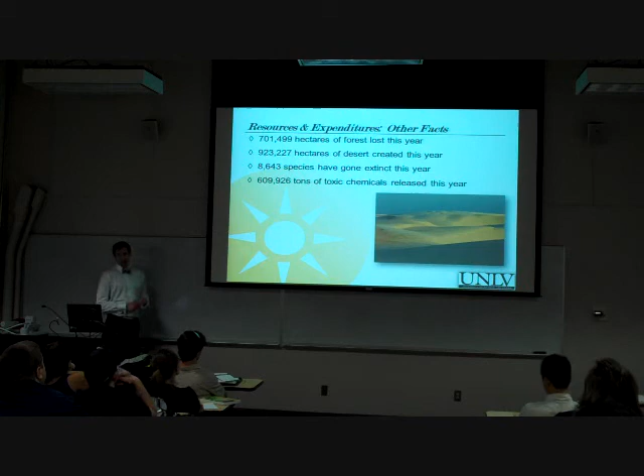701,499 hectares of forest have been lost this year. Hectares are a little bit bigger than a football field. Nearly 1 million hectares of desert were created this year. 8,643 species have gone extinct, and 609,000 tons of toxic chemicals have been released in some capacity this year alone.

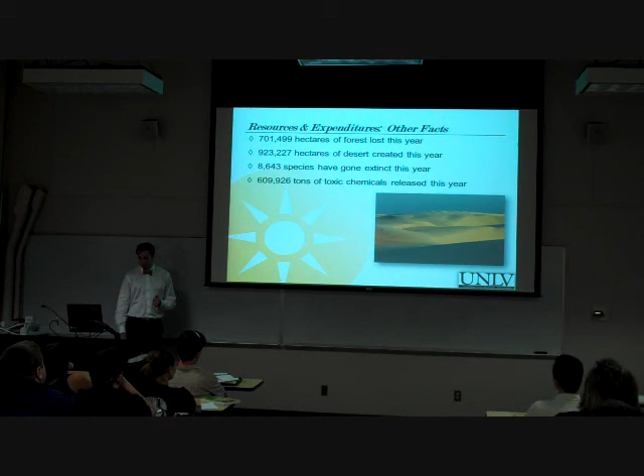So there's hope. Starts with this class, right?

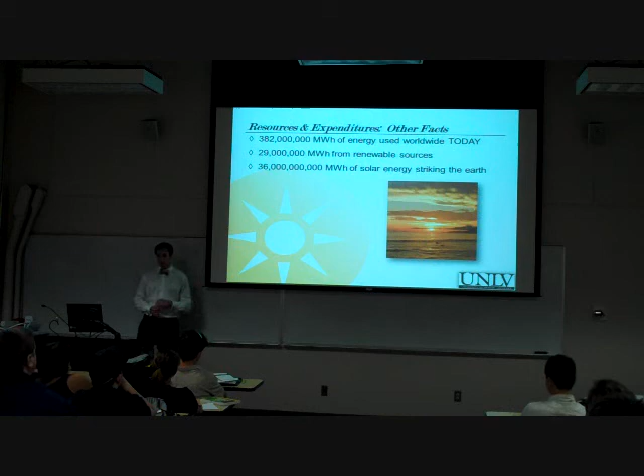To some small degree, 382 million megawatt hours of energy are used worldwide today. Only 29 million of that is from renewable sources, which is less than 10%, I will say it's around 7%. But at any given time, 36 billion megawatts of energy from the sun are striking the earth at the same time. So trying to harness that number is really one of the big keys to a more sustainable, lower emissions future.

So there is a movement, we'll talk about it, moving to distributed energy. Who knows what distributed energy generation is?

What if you had a solar panel on every roof that's already in a disturbed area? That's kind of what we've been talking about, sustainable land use, not disturbing parts of the Mojave National Preserve or really windy parts of Oregon that might just be virgin greenland right now. But actually distributing that energy to places that already are disturbed, over parking lots and parking garages and on rooftops. So that's one of the debates we'll talk about a little bit.

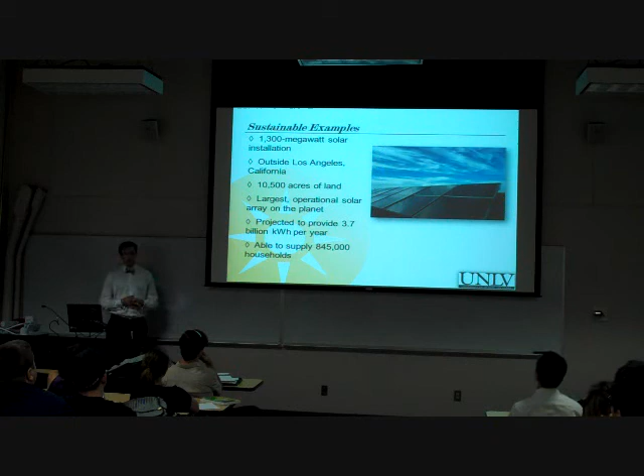Distributed energy might be a better solution. A 1,300 megawatt solar installation outside of LA, 10,500 acres of land, the largest operational solar array on the planet, is projected to provide 3.7 billion kilowatt hours per year, able to supply 845,000 households.

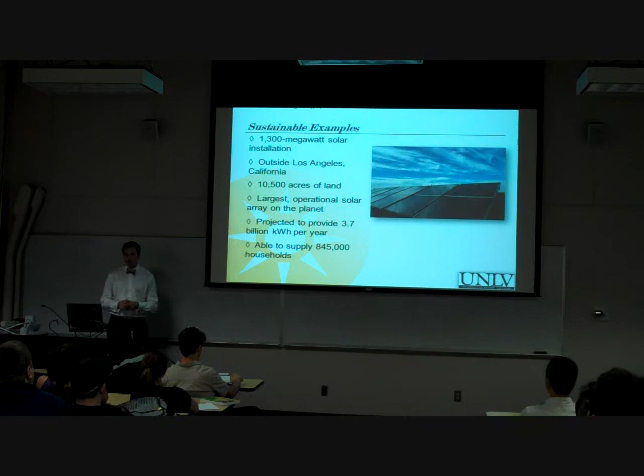So you have to temper all these things we're going to be talking about as a trade-off. If you have low flow fixtures, that might be a trade-off in terms of occupant comfort. You have light sensors that go up and down hallways, so you won't have the lights on all the time, and people might think they're closed or something like that. So there's always a customer trade-off, a social trade-off, or an environmental trade-off. In this case, you might get solar renewable energy that's not polluting the environment directly, but you're taking up 10,500 acres of land.

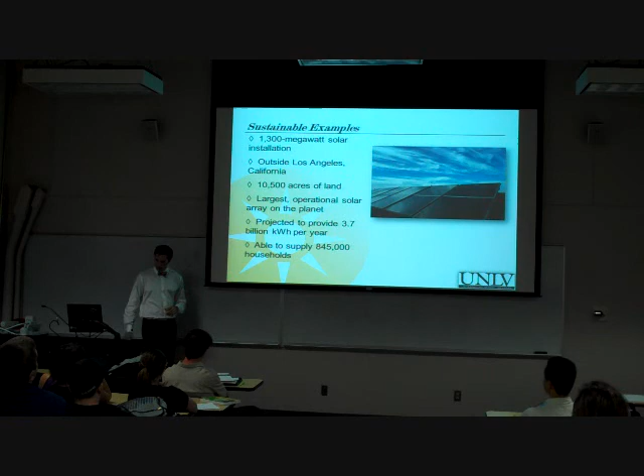If you ever notice walking around campus, it's much cooler within that quad area than it is when you're walking from the parking lot or walking off of Maryland into that area. So just think about those little microclimates. If you ever go to the Springs Preserve, that's a really good example of a microclimate. They have a lot of desert adaptive plants that retain moisture, provide shade, and keep the temperatures down overall. So exploitation of microclimates is a good example used here.

If you just have one window, you're not going to have much of an effect. If you ever just open one window in your car, you usually want to do the opposite one, diagonal across from you, right? Same idea in a house, an apartment, or a commercial building like this. Also recognizing the fact that heat rises, trying to provide ventilation out the top of your building, creating an actual swoop: cool air coming in, and hot air going out the top. Proper orientation—what do I mean by proper orientation?

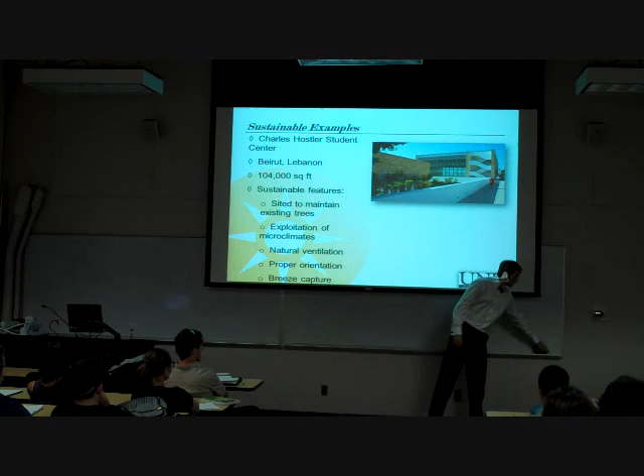So, when I was looking for a house, or when you're looking for a house, you don't want your house...

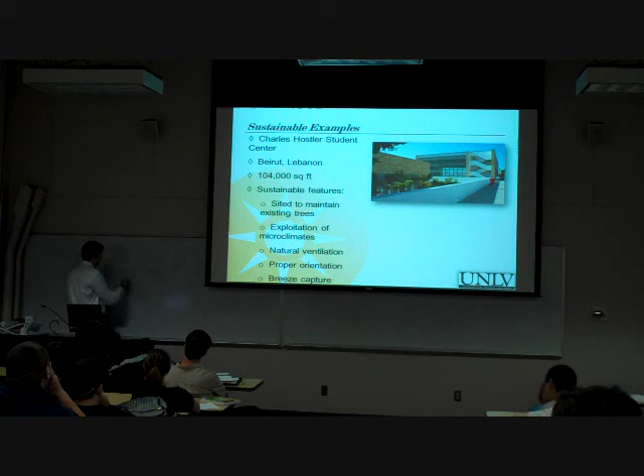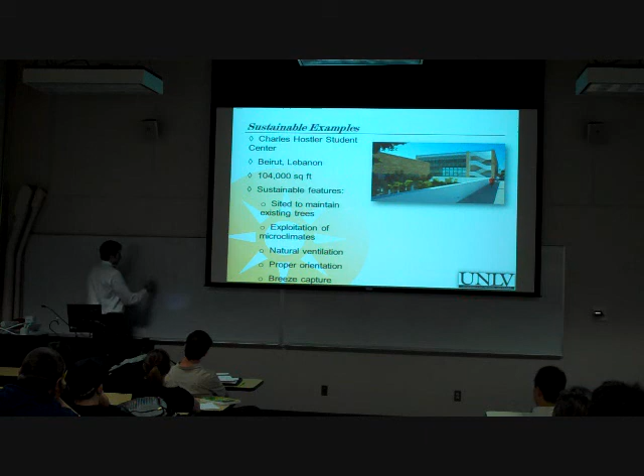This is your big giant back window, right? The sun's doing this. Let's say this is east - the picture's reversed for you guys. So all day long, those rays are coming into this window and heating up your house. You want that side to be the most shaded. You want northern-facing exposure so you get the benefit of daylight without the detrimental effects of those southern rays creating that hot effect. So if you're renting an apartment or buying a house, try to pick a lot where the building's orientation isn't detrimental to your overall heat gain through those windows.

You have solar just coming through the windows. You experience it in your car. I'm trying to make these small connections so you guys can visualize the commercial and residential impacts. We've all experienced how hot your car can get just from sun coming through those windows. Same thing happens in your house. What happens? Your air conditioning bill goes up, your electricity bill goes up, you end up spending more money on electricity, turning on more coal-fired power plants, and we have a detrimental social, environmental, and overall economic impact.

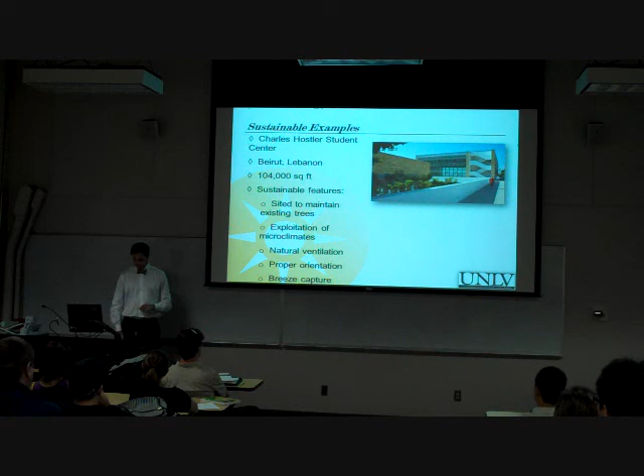Right? Terry Thomas office building. This is in Seattle, 40,500 square feet. Some sustainable features - this is a LEED Platinum commercial interiors and a LEED Gold core and shell building.

Who knows what a core and shell is? Core and shell - just think of the idea, like a nut has a shell around it, right? It's the skin of the building, it's the outside of the building.

So you're building an office building. One of the first projects I worked on in conjunction with my team, I worked on a pretty minor one. I started out at Caesars here in town, and I worked on multiple campus projects back in Florida, a lot of LEED projects. I've probably been working on LEED projects for about a decade, in different historic preservation capacities, office buildings, and academic buildings. I moved out here working on really large scale structures around 2005, 2006 - maybe some of you remember those big times. I started out at Caesars Palace, a large expansion, $1.3 billion expansion, with a couple of LEED projects there. And they were also doing the Molasky building, which is downtown.

If you're familiar at all, it's a blue glass building right here at Union Station, Central Park area. So that was a LEED Gold core and shell. Say this is the skyscraper portion - if you know the building at all, it's got this parking garage down here, and this is the tower part with all the glass, right?

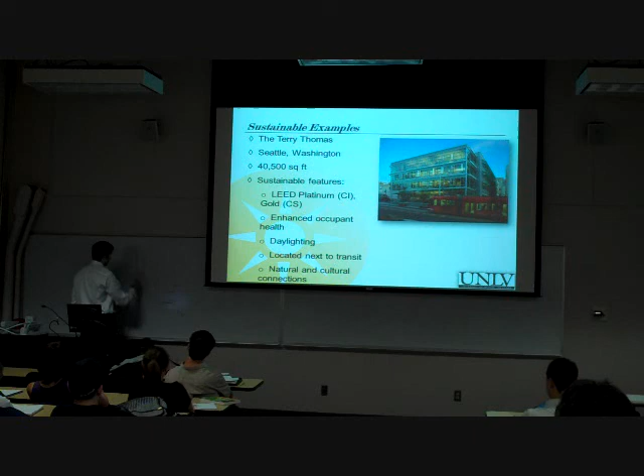So the core and shell would just be this actual glass, and then within here, on each level - what's in the internal workings of a typical office building? The elevator core, the common systems that operate the entire building run through that core. So the mechanical, electrical, plumbing systems, and the actual shell and floors of the building itself. So it's the core, the actual elevator core that comes all the way through, and the shell that wraps the whole thing, right?

So the core and shell can be certified as LEED Platinum, the highest ranking you can get. And then once tenants start moving in, each one of their tenant improvements - because usually tenants will only rent floor 5, or a quarter of floor 4, or whatever it may be - you'll have 50 tenants within an office building, so you'll be able to certify them as they develop those little pieces of the property. While other pieces might be vacant, you'll be able to certify the ones that are actually being occupied. That's why there's two rating systems: the core and shell, the outside skin, which is always done early in the project, and then once you get tenants, the tenant improvements or commercial interiors, the CI, can take place.

The Platinum designation has different rating systems, each with different criteria. For core and shell, that's measuring overall building usage and overall materials usage. For tenant improvement, that's looking at tenant finishes. So where the core and shell might have had to use really structural steel and glass and things that weren't as recyclable or located regionally, the tenant improvement itself, the CI, could have used materials that were more local, reused, and recycled. It just depends on what's actually being installed and implemented on the inside and outside.

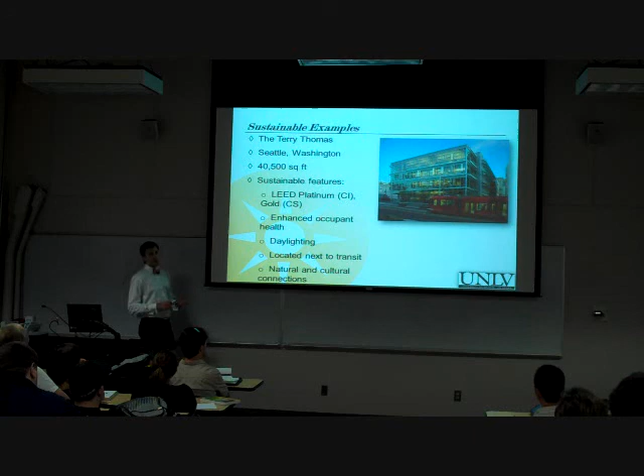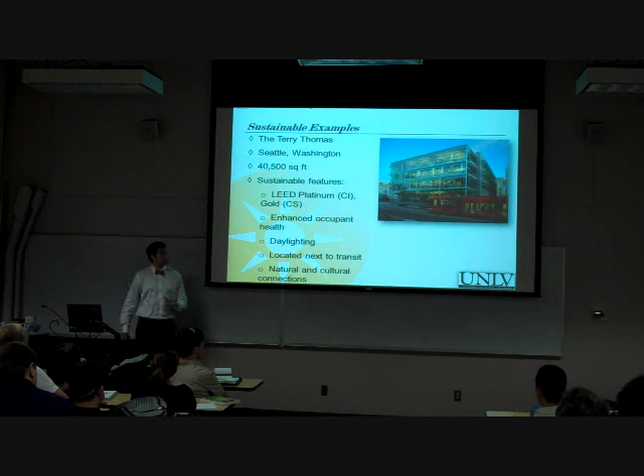Located next to transit, which you can see - using mass transit is more sustainable than taking your own individual automobile on the highway. Natural and cultural connection - it's located across the street from a park, there's museums and other cultural interests in the area. Remember, it's not just about the environment, but that quality of life and overall triple bottom line as well. So community revitalization, community engagement, kind of building up dollars in the community and having people down in this area.

Bronx Library Center, in New York City, 178,000 square feet. Sustainable features: 90% of debris was recycled from the existing demolition and then throughout construction - we'll go over some of those strategies once we move more into construction waste. 20% energy savings - energy can be saved in all different manners through all different disciplines: material selection, MEP - mechanical, electrical, plumbing designations - and then equipment selection, how the building's sited, where is that sun coming from, those types of things.

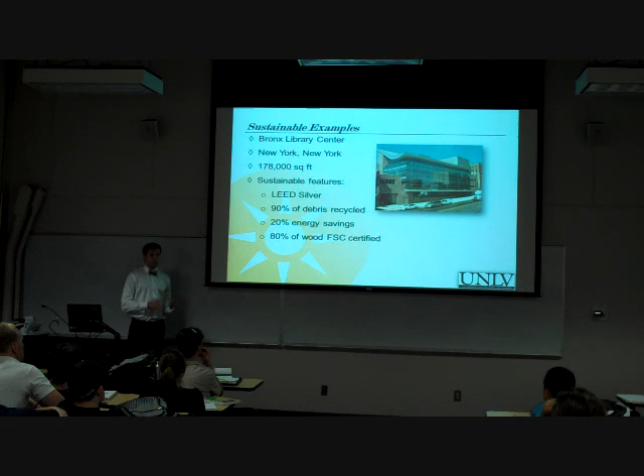80% of wood was FSC certified. Anyone know what FSC is? It's Forest Stewardship Council - a third party. Remember we talked about the importance of third parties telling you that something's green or sustainable - otherwise there's no real rigor to it, no real backing. You can say that you took all these classes at UNLV, but if you don't have that degree, the third party - which is UNLV - no one's really going to care, right? So it's kind of the same thing. It's a credential, a rating that these wood companies get.

Basically, this is a sustainable forestry initiative where they're not clear-cutting forests. They're selecting prime wood locations, allowing the forest to regenerate before coming back and cutting again, and creating a more sustainable forest culture and forest industry overall.

It also uses very low formaldehyde. Formaldehyde is a known carcinogen that occurs naturally in the built environment, but it's also used highly in construction materials as a glue. In high concentrations, it can give people different forms of cancer. You guys remember those Katrina trailers? Everyone was getting nosebleeds and brain aneurysms and different brain cancers - high levels of formaldehyde within each one of those trailers because they were made very cheaply and very quickly of all these different resins. So it all comes full circle.